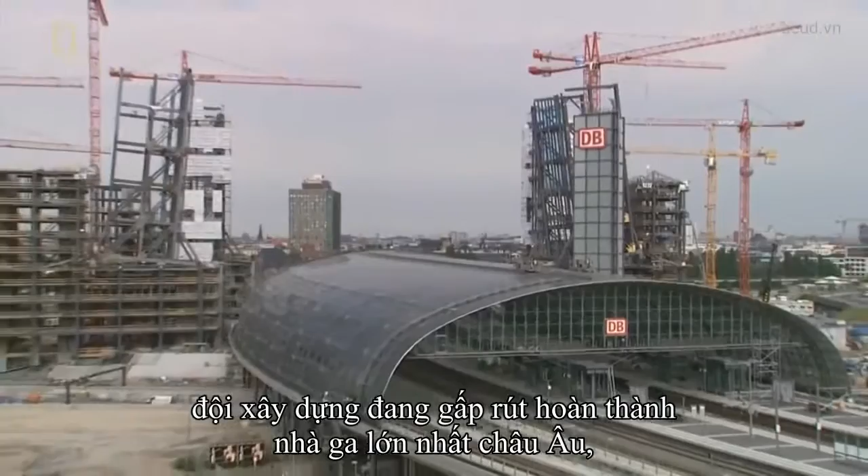Berlin, Germany. A construction team races to finish the largest train station in Europe before next summer's World Cup comes to town. To meet this deadline, 2 massive steel towers must be tipped over their new glass station in under 3 days. It's an engineering feat never before attempted. Can this team of engineers get this daring plan to work?

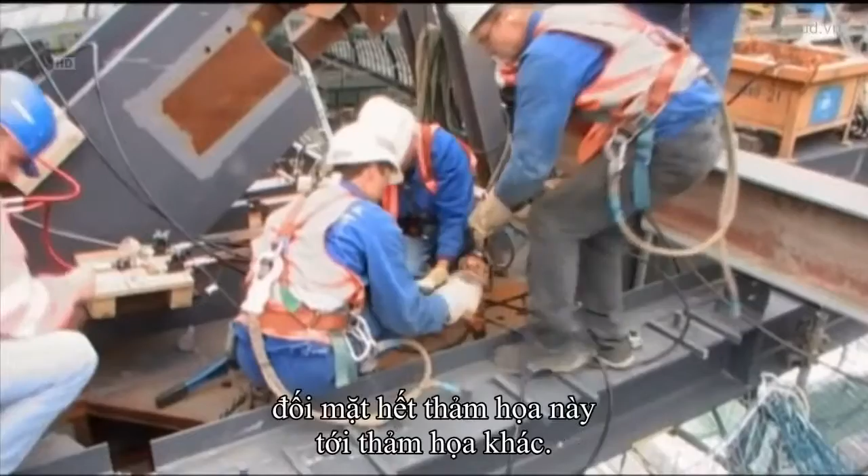In Germany, builders are racing to complete an architectural crown jewel. They've labored for over a decade, confronting one disaster after another. When finished, this will be the largest train station in Europe. 7 levels containing a staggering 180,000 square meters of space. Nearly as much space as the Empire State Building.

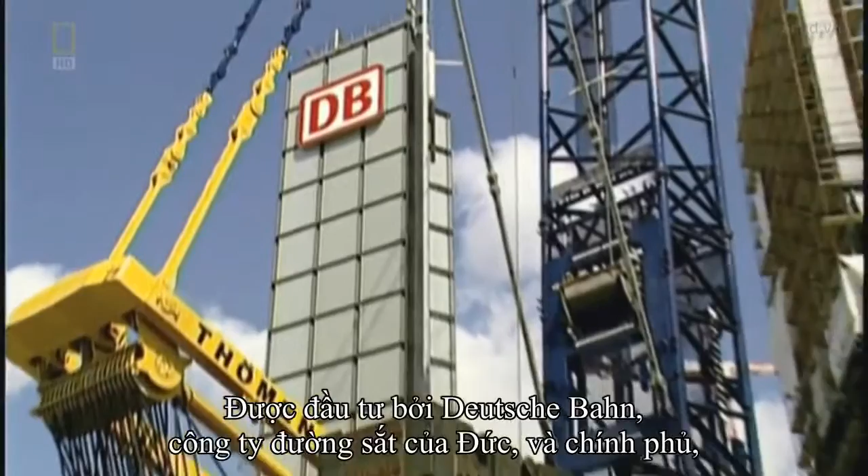Even more amazing, 2 office buildings will straddle the station, both standing 14 stories tall, with 4-story high bridges suspended just above the glass and steel roof of the station. The price tag? Over 4 billion euros and counting. Financed by the Deutsche Bahn, the German rail company and the government, and designed by a world-famous architect, the project is intended as a bold statement. If it works, it will literally and figuratively reconnect East and West Germany, ushering in a new era of unification.

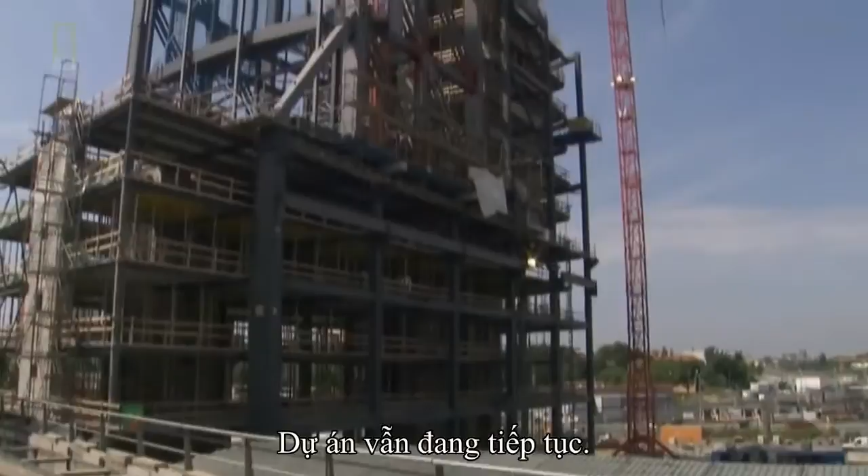But the project has faced terrible setbacks. It's years behind schedule and billions over budget. To make matters worse, the architect is suing the developers for cutting corners on his design. Soon, the project will be coming to a head. The builders are about to execute a move never before attempted in the history of construction. They will attempt to gently pivot these 2 massive halves into their final position, forming a steel bridge just 2 meters above the station roof.

It's a terribly risky scheme. If anything goes wrong and the bridge sections hit the glass roof below, the project would suffer unthinkable damage, and the cost would go up by more millions. Will Berlin's new central railway station ever be finished?

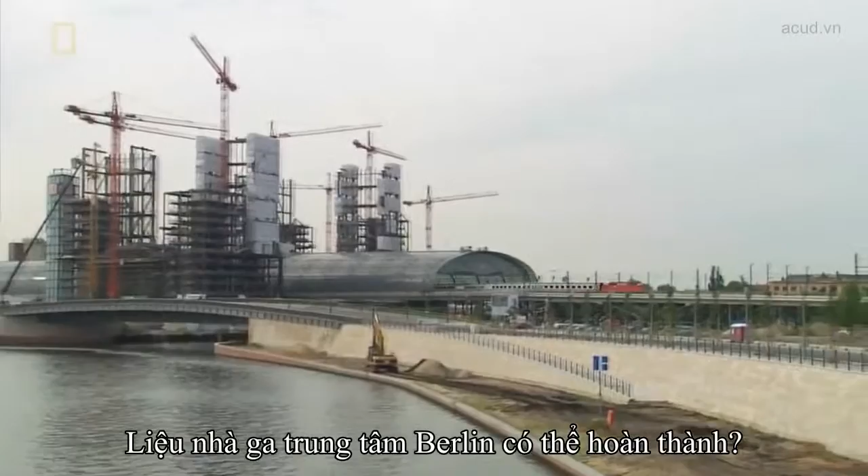Since the 1989 fall of the Berlin Wall, Germany's capital city has undergone a frenzy of rebuilding in an attempt to reclaim its historical place as the cultural and economic center of Europe. What better way to solidify that role, planners thought, than with a truly world-class rail station? As the centerpiece of a completely rebuilt transportation system, the station would not only relink East and West Germany, but all of Europe, by connecting Paris with Moscow and Stockholm with Vienna. Berlin, of course, would be at the center of it all.

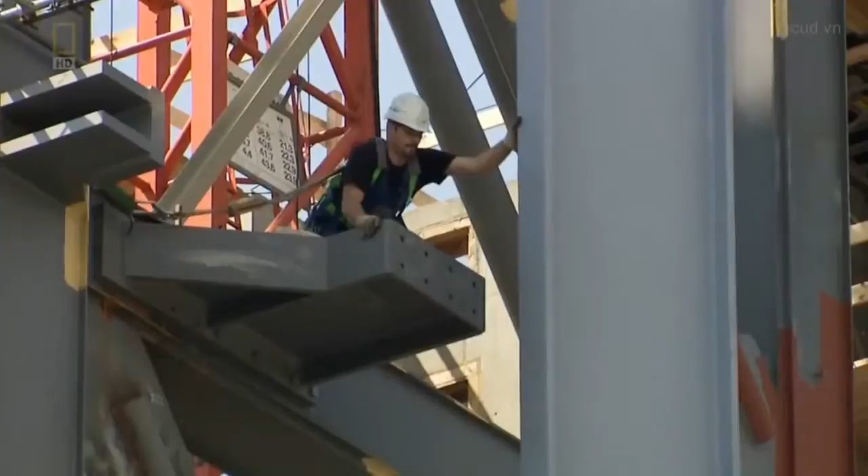But today, 5 years after its original scheduled completion date, the project is still under construction. And it's reached a critical moment. Down on the streets, crowds begin to form. They've come to watch an unfolding drama. A milestone event in the history of construction engineering. The fate of the entire project hinges on this step.

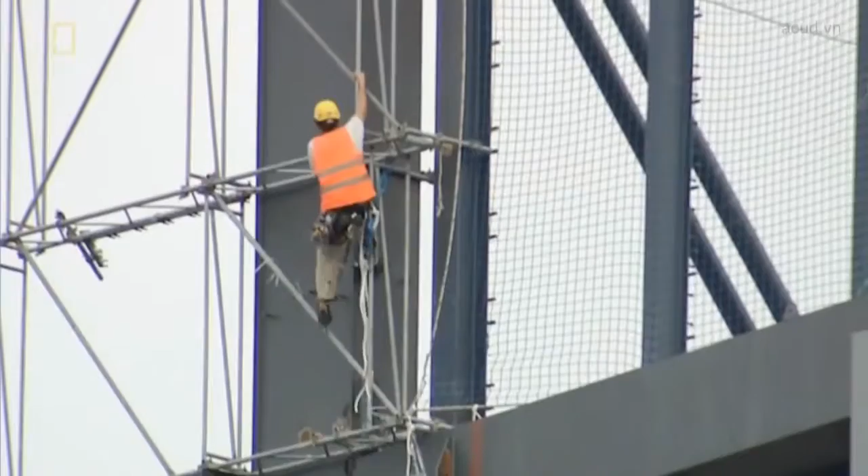Up in the air, a team of specialized engineers and workers are preparing to execute a dangerous maneuver. Scaling the steel like mountain climbers, workers make their final adjustments. Check and double-check hundreds of details. All eyes are now focused on a pair of huge steel bridge sections. When finished, they will form a bridge, 4 stories high, hovering just above the roof of the train station. The bridge will join the 2 sides of the office building and will itself contain thousands of meters of office space.

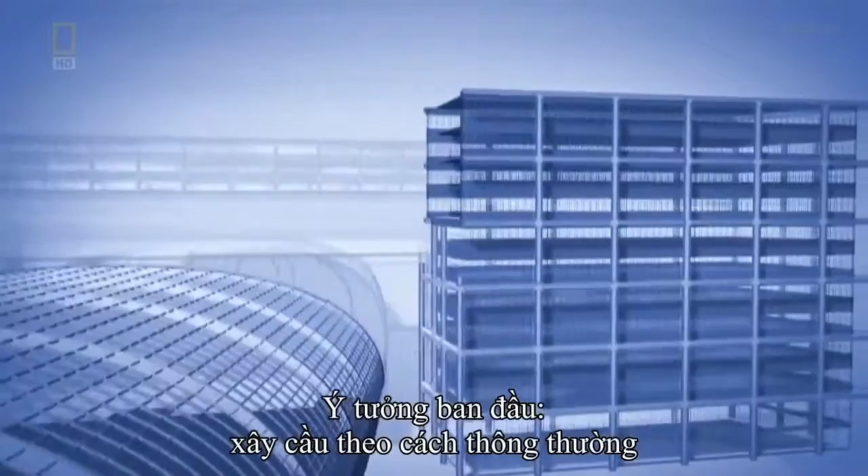Because building a working train station was the top priority for builders, the twin office towers would have to be built after trains were running through the nearly completed station. One of their original ideas called for building the bridge the usual way, starting at one side and building out horizontally over to the other. But engineers realized that building the bridges that way was too dangerous. Safety officials lay awake at night at the thought of cranes swinging these huge steel girders above their new glass roof train station, packed with thousands of commuters. They'd be forced to shut down train services over 6 weeks until the bridge was done. But that would have brought Berlin to a standstill.

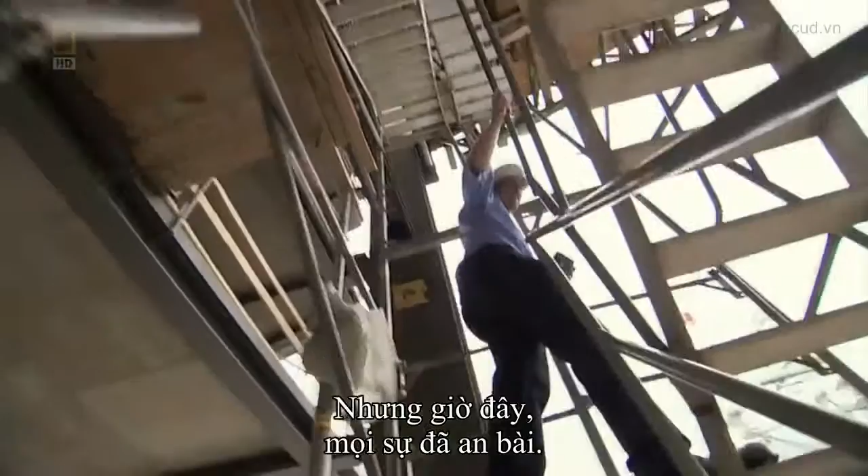So engineers came up with a remarkable solution. They would build the bridge in halves. Each half was built not out, but up. Now the 2 halves are ready to be lowered into place with cables. The tipping technique has never before been used in an urban setting. But now, there's no turning back. Starting at 10 tonight, train services through the station will be halted. But only for the weekend. They'll have 54 short hours to get the bridge lowered and the sections attached.

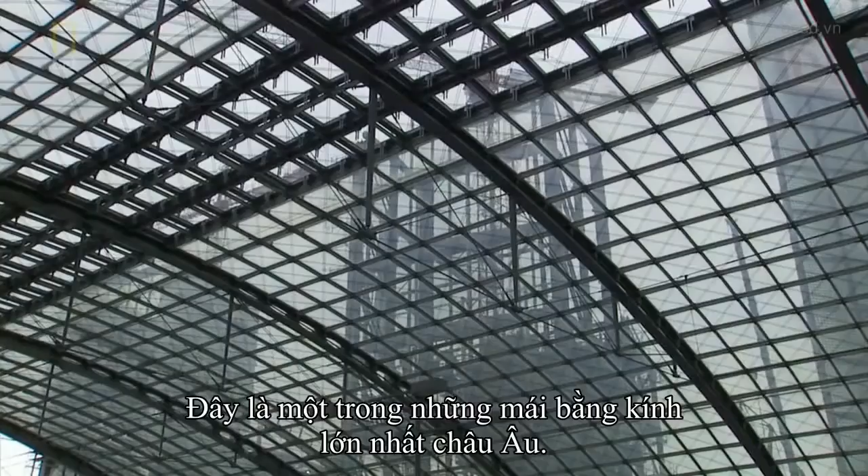But each section weighs over 1,200 tons. If something goes horribly wrong, it could mean the total destruction of the station's spectacular new glass roof. It has one of the largest glass roofs in Europe. Over 11,800 individual square panes. Each pane weighs almost 100 kilograms, bringing the total weight of the glass alone to 1.2 million kilograms. That's a lot of glass.

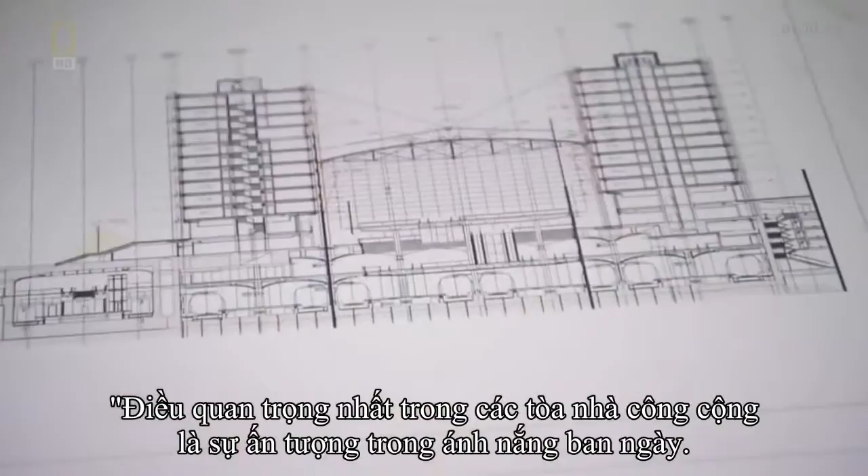World-famous architect Meinhard von Gerkan knew from the beginning that he wanted glass to play a prominent role in the station's design. The most important thing for a public building is to have the impression of daylight. You feel much better if you are part of the total environment, the natural environment.

As it happens, big glass structures are all the rage in Germany right now. When the Reichstag, the German parliament, was rebuilt in 1999, the government insisted on installing a glass dome on top to reflect the new German transparency. Glass has traditionally been a material of choice for train station designers, but it's always been expensive and tough to work with.

Early train stations with glass also needed immense support structures of steel to hold up all that heavy glass. The result, in spite of the glass, not much natural light could get in. The stations were still pretty dark. Von Gerkan wanted to do better.

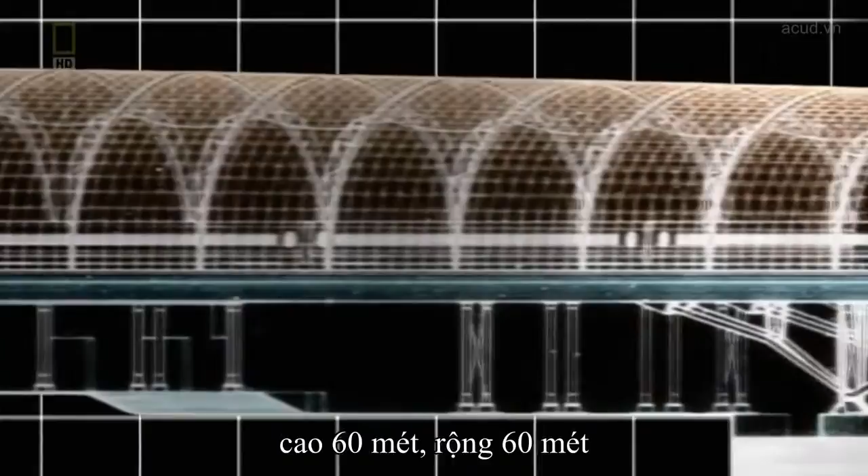His design called for a massive curving glass tube, 16 meters high, 60 meters wide, and over 400 meters long, to form a nearly transparent roof and walls for the main platform. He needed to find a way to eliminate all that steel, to have the glass support itself, or at least appear that way. But a glass structure can be as dangerous as it is beautiful.

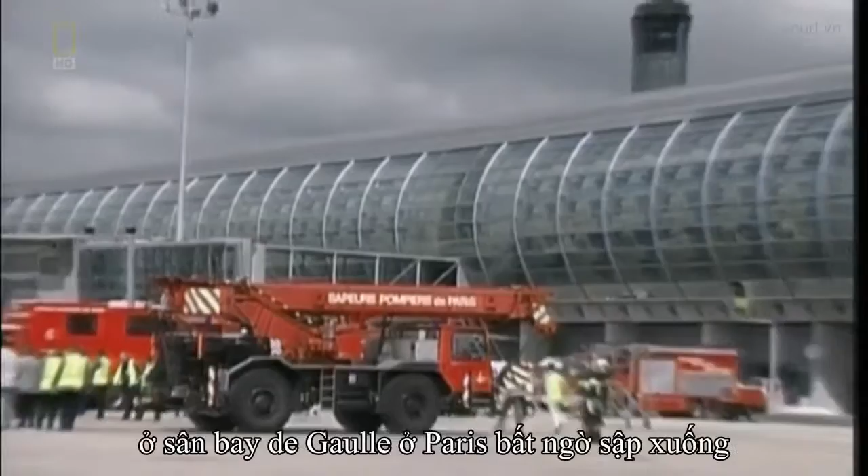In 2004, almost a year after its opening ceremony, a brand new glass terminal at Paris's de Gaulle airport suddenly collapsed, killing 4 people. Investigators pointed to both design flaws and construction defects.

Now, with just hours to go before the crew here in Berlin attempt one of the most unorthodox construction tricks in history, the possibility of disaster cannot be far from anyone's mind. It is the ultimate challenge for a project that has missed one deadline after another. Today, a new deadline looms, and the teams know they can't blow it.

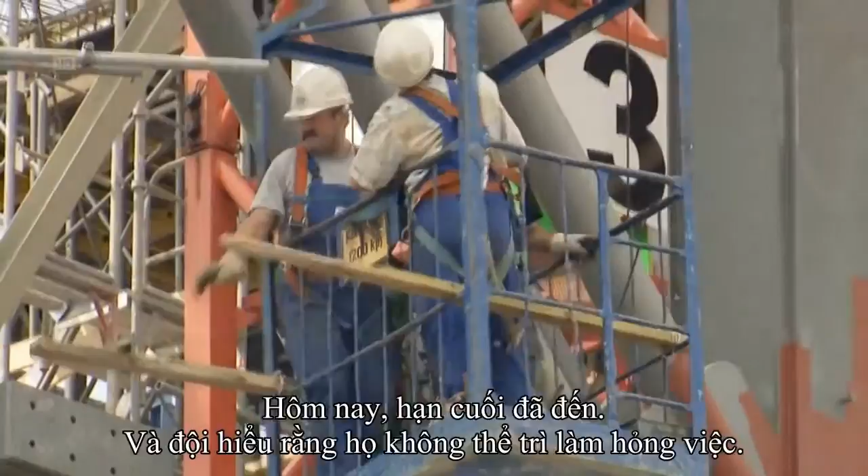Mid-next year, the World Cup football tournament will focus the world's attention on Germany, the most watched sporting event in the world with an audience of billions, more than even the Olympics. Millions of fans from across the globe will flood into Germany, with the final game here at Berlin's Olympic Stadium. City officials desperately want the global event to also serve as the station's inauguration.

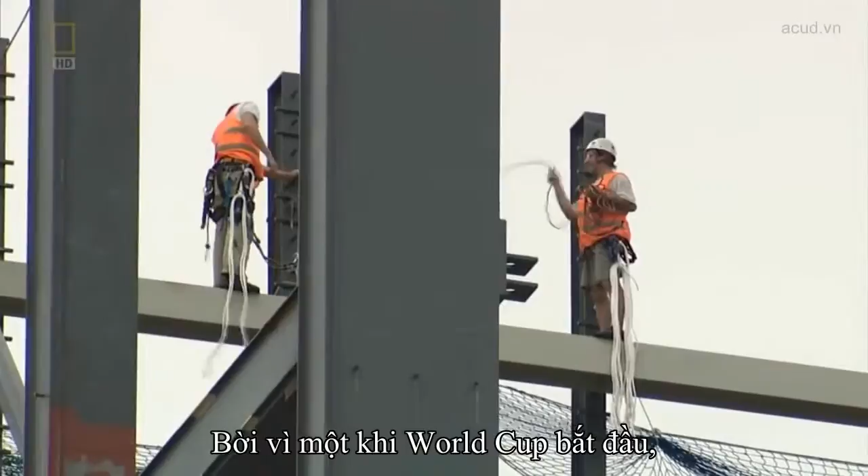Berlin officials expect up to 3 million football fans to descend on the city. They desperately need the station completed, because once the games begin, nearly 500,000 fans will use it every day. If the project is still under construction, it will be a huge embarrassment for the country in front of an international audience.

All this pressure now sits squarely on the shoulders of the two men in charge of the operation. Olaf Severin will run the crew lowering the south tower. Bernd Naujoks will lead the north tower team. They go over the plans one last time. Years of preparation have led up to this weekend.

At 10 tonight, all train traffic through the station will be halted. Olaf and Bernd must complete the work by 4 a.m. Monday, the start of rush hour, when the train schedule must resume. If they're late, Berlin becomes one huge traffic jam. Between now and Monday, neither one of them plans to get much sleep.

On paper, the plan is simple. Each bridge section currently stands on its end. Both towers are fitted with 12 massive jacks, 4 on top and 8 on the bottom. To begin tipping the sections, the men will first activate the top jacks. These jacks pull up on a series of steel cables anchored to the tower, tipping the tower on a single pivoting hinge.

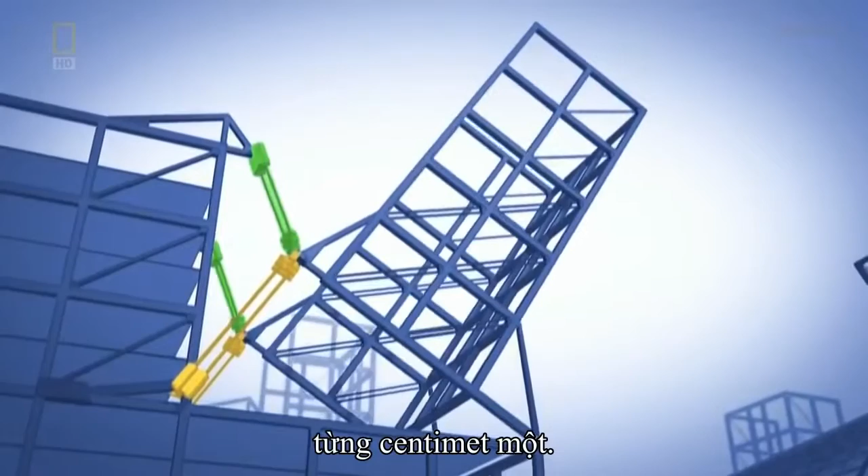Once it reaches an angle of 15 degrees, it will start to fall. To keep it from crashing down, the bottom jacks are now activated. These jacks act as a brake, lowering the tower by slowly letting out a second set of cables, centimeter by centimeter. The two sets of jacks share the load until the bridge sections reach an angle of about 40 degrees. At that point, the bottom jacks take over completely for the rest of the ride.

A simple plan, but with years of experience, Olaf knows problems could spring from any direction. Snapped cables, misfiring hydraulics, high winds. So computers are on board to control the process. They can monitor the shifting weight, regulate the speed of the jacks, and shut down everything if they sense a problem.

Olaf and Bernd share final authority, and each of them knows that if they have to, they can override the computers. The two decide to make a bet on who will get to the bottom first.

One thing is for sure, Bernd. We will reach the bottom first. What? No, no. Let's bet a case of beer.

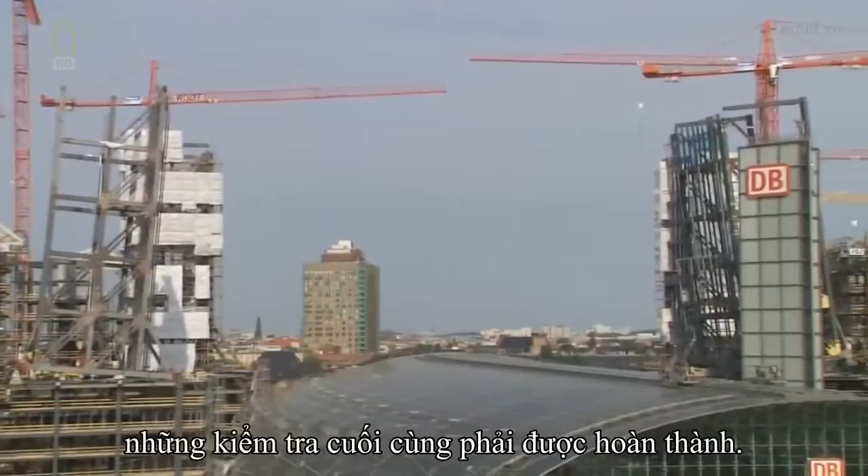But before the starting horn can sound, final safety measures must be finished. Workers dangling 70 meters in the air attach nets to the bottoms of the bridge sections.

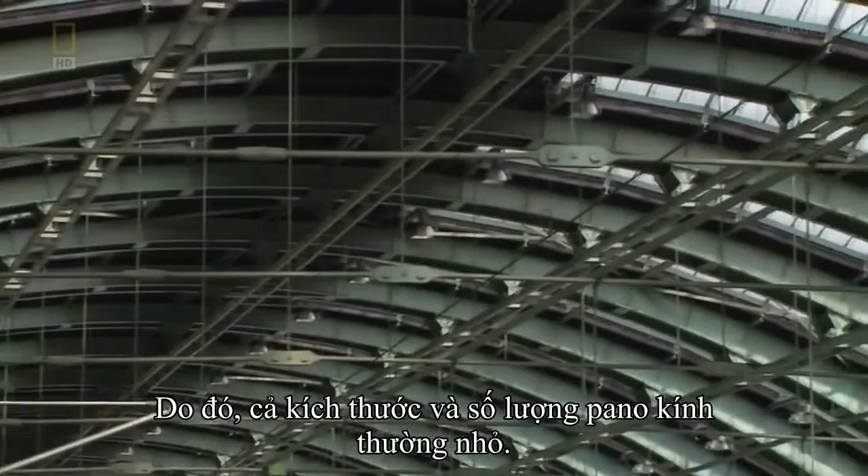The nets are supposed to protect the nearly 12,000 glass panels of the station roof, in the event that something falls from one of the sections during the tilt. Glass has been used in train station roof construction for over a century, but early builders were limited by the expense and fragility of glass. So builders kept both the size and the quantity of the panes they used small.

Architect von Gerkan's design for the new Berlin station called for nearly 12,000 panels, each over a meter square. For such a vast quantity, project managers came here to the Guardian Flachglas factory just outside Berlin. Virtually all of the glass used in the station was manufactured here, using a modern method called the float process.

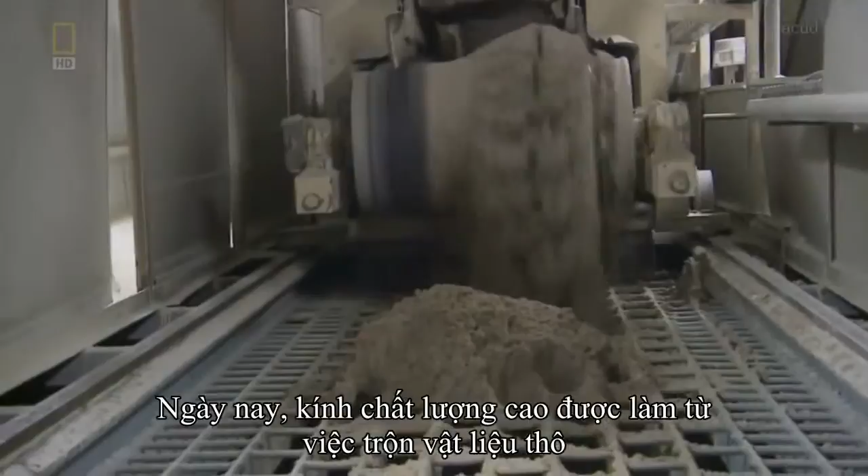Today's high-quality glass is made from a blend of raw materials, including silica, soda, and lime. These ingredients are combined with recycled glass and fed into a huge furnace. The furnace is heated to over 1,500 degrees Celsius, hotter than volcanic lava. So hot, workers can only keep watch through tiny windows, wearing heat-resistant clothes and goggles.

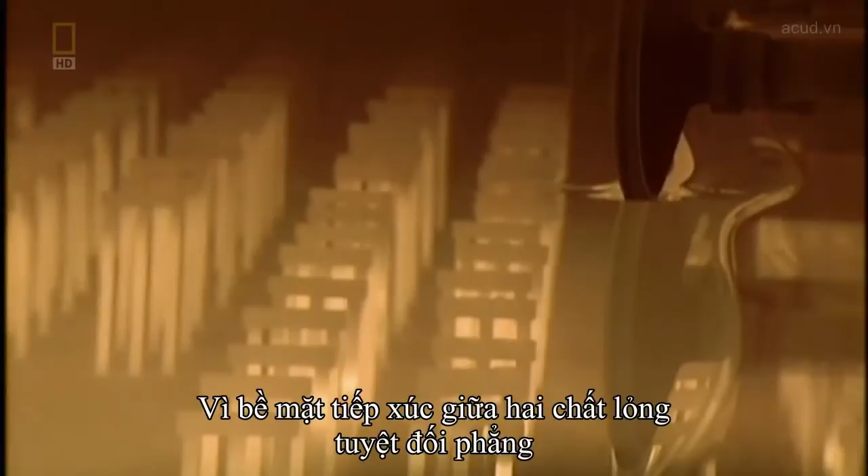The extreme heat inside the furnace melts the ingredients into a liquid glass. The glass spreads out over a layer of molten tin. Because the plane of contact between the two liquids is perfectly flat, the resulting glass will be virtually free of optical distortion. Next, the glass is slowly cooled in these 120-meter-long giant coolers.

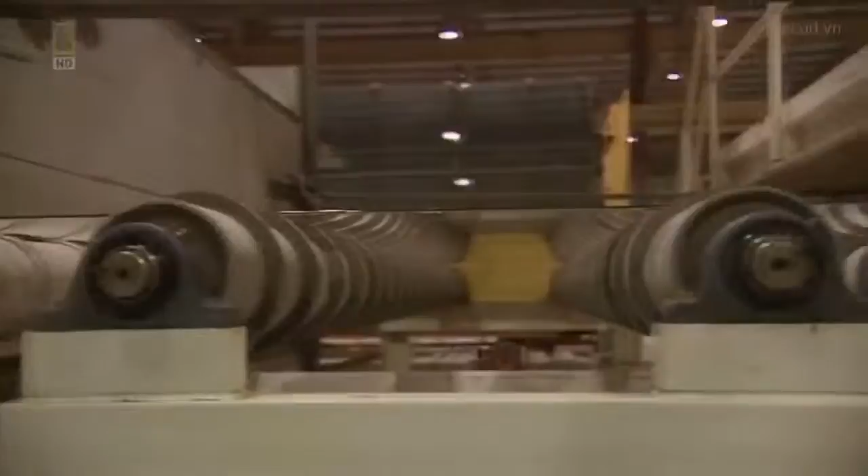This factory could theoretically produce glass sheets over a kilometer long, but they would be essentially impossible to ship. So each piece is then scored, cut to size, and trimmed.

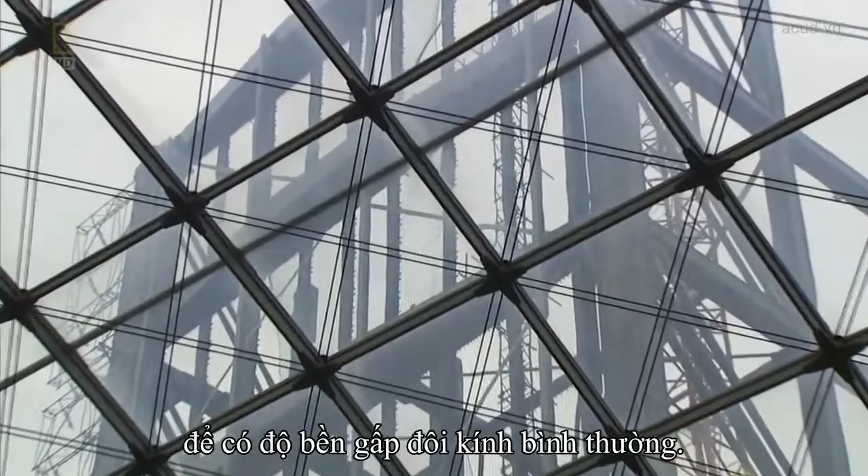But the glass panels von Gerkan needed for the train station needed to not only be large, but also extra strong, capable of withstanding bad weather and the constant vibrations from trains. So the glass for the station is tempered to make it twice as strong as normal window glass. As a final step, a layer of UV-absorbing material is fused with the glass. This step helps prevent the station from becoming the world's largest hothouse.

Back at the construction site, there are only 3 hours left until the big tip-over is supposed to begin. Team leaders Olaf and Bernd are anxiously awaiting the signal that train traffic through the station has been halted so that they can begin the delicate operation. But now there's a new worry. The skies over Berlin are looking ominous, and severe thunderstorms are forecast.

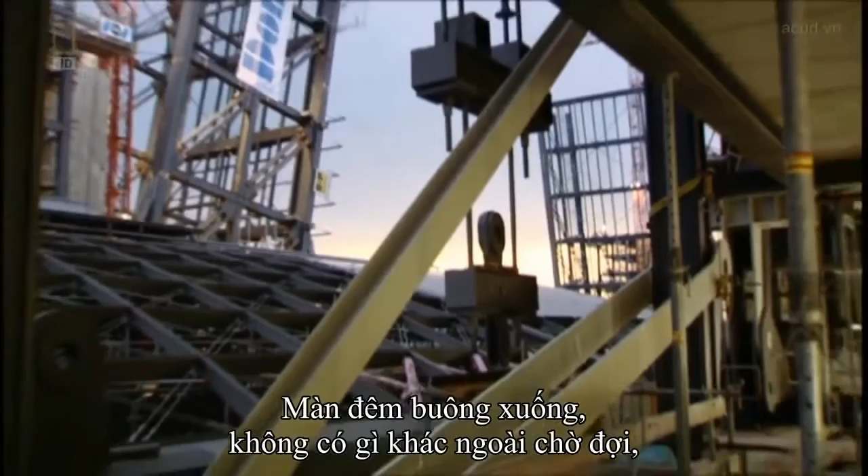The two men know they must do everything they can to stay on schedule. The trains can only be stopped for 54 hours. But they can't put their men at unnecessary risk. If the conditions get too bad, they'll be forced to call off the procedure. As night falls, there's nothing to do but wait and hope that the storm blows over.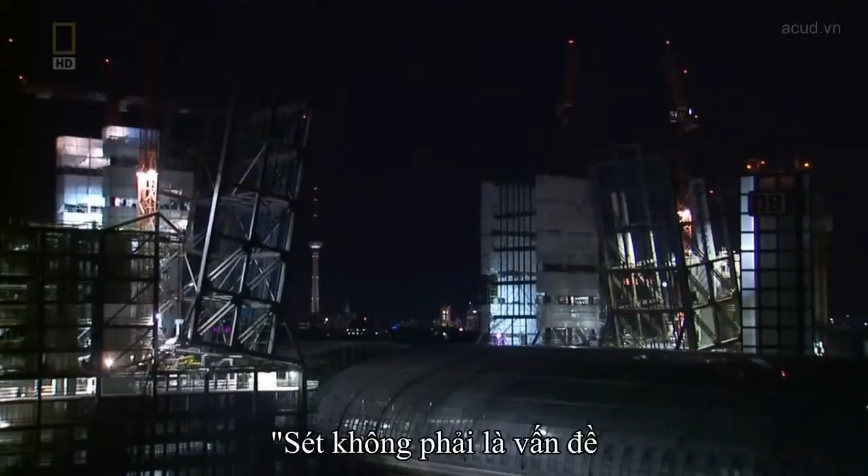10 p.m. at the construction site of the massive Berlin rail station, and lightning is lighting up the sky all around. Rain is coming down in sheets, but the wind seems to be holding, so engineers make the difficult decision to proceed. Lightning should not be a problem. The wind has started to increase, but our static calculations consider such wind loads.

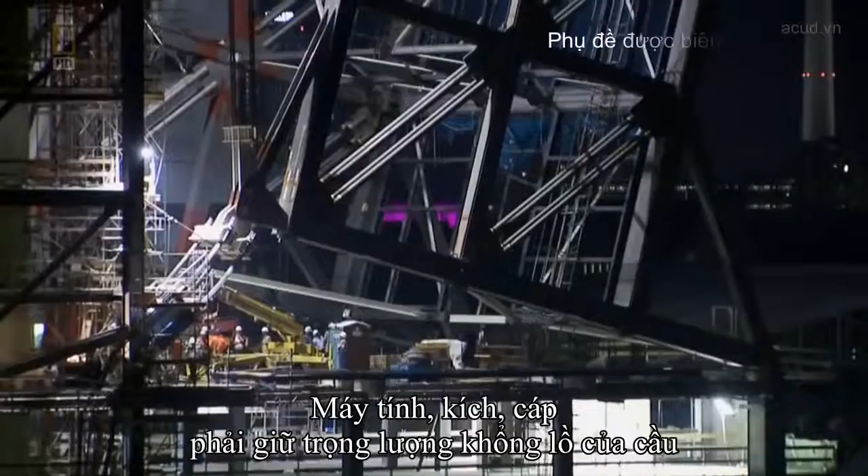After the last train leaves the station, the starting horn blares. Foreman Bernd gives the signal, and his North Tower team springs to action. The name of the game in this entire process is control. The computers, jacks and cables must keep the massive weight of the bridge sections under constant and complete control for the entire tilt. If they don't, the sections could jerk or start to sway, which could be disastrous.

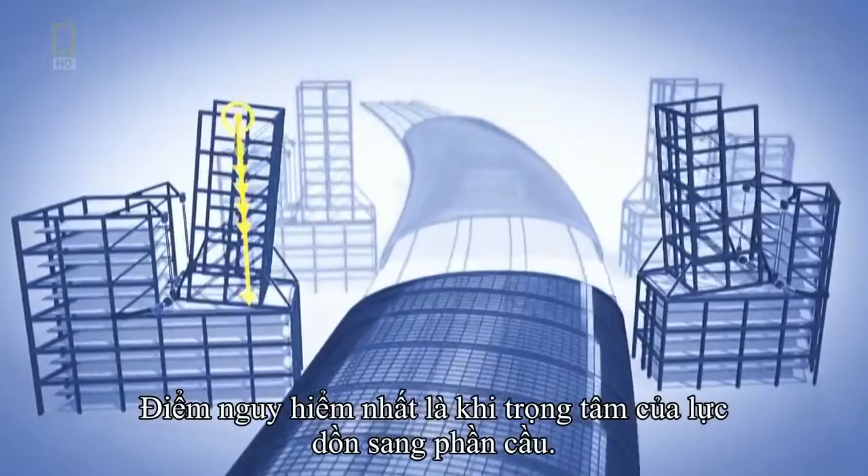Of course, gravity will be doing most of the work. All the machinery and all the men are here simply to keep gravity from working too fast. The scariest point will be the moment when the center of gravity shifts on the bridge sections. At that moment, the 12 jacks and nearly 400 cables will be pushed to their limit as they carefully lower the 1,250-ton weight of each section over the station. If the team can get past that changeover point smoothly, the rest of the ride down should be easy.

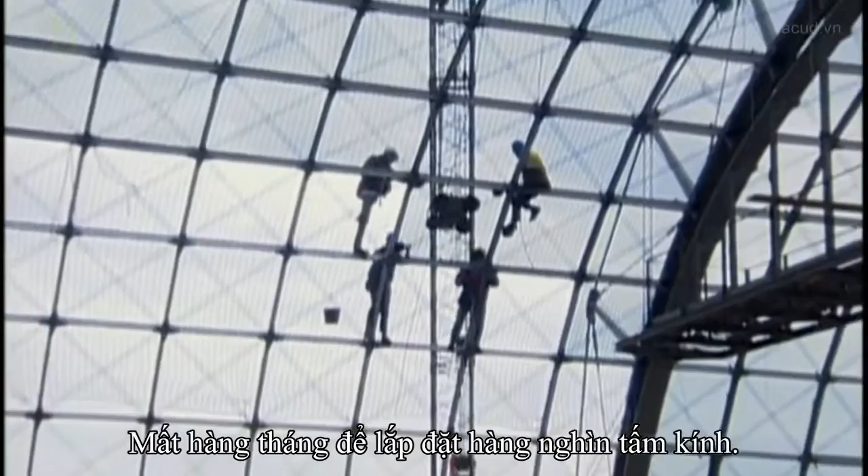The operation is the first time in construction history that two massive towers have been intentionally tipped over so much glass. It's taken months to place the thousands of glass panels. Each panel sits inside a perfectly sized steel square frame. This interlocking steel framing matrix is a crucial element of the design because the steel itself is so thin, it almost looks like the glass is supporting itself.

Architect von Gerkan wanted the station flooded with light, so he needed to find a way to hold up the glass with as unobtrusive a support structure as possible. And he could not sacrifice safety. The structure needed to hold firm against constant vibration from the trains rumbling through below, hundreds every day. Von Gerkan also wanted to avoid cluttering up the interior of the station with traditional support posts. So project engineers came up with an ingenious solution: an elaborate skeleton of external supports.

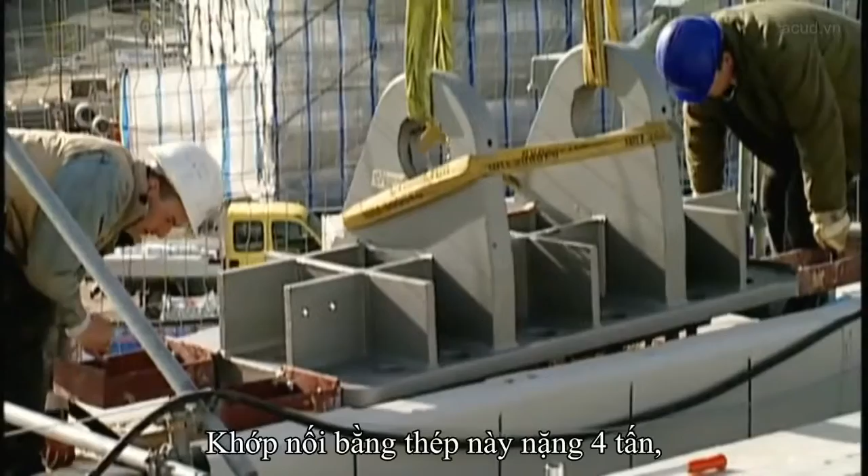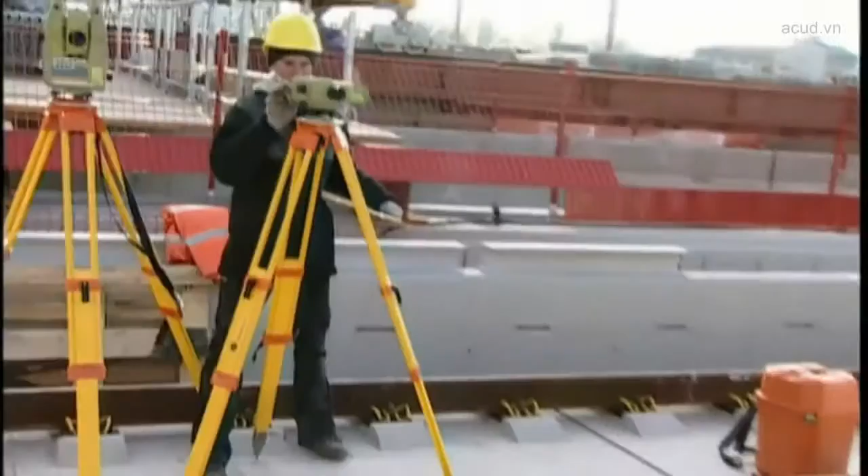This steel anchor joint weighs 4 tons, nearly as much as 2 SUVs. It's one of 46 identical anchors that, when placed and bolted, will serve as the primary support for the entire glass and steel lattice above. Each joint will be capable of holding almost 200 tons. Placement is critical. A surveyor carefully guides the team. Once the anchor joint is secure, cranes lower one end of an 11-ton end section of one of the station's arching main support beams.

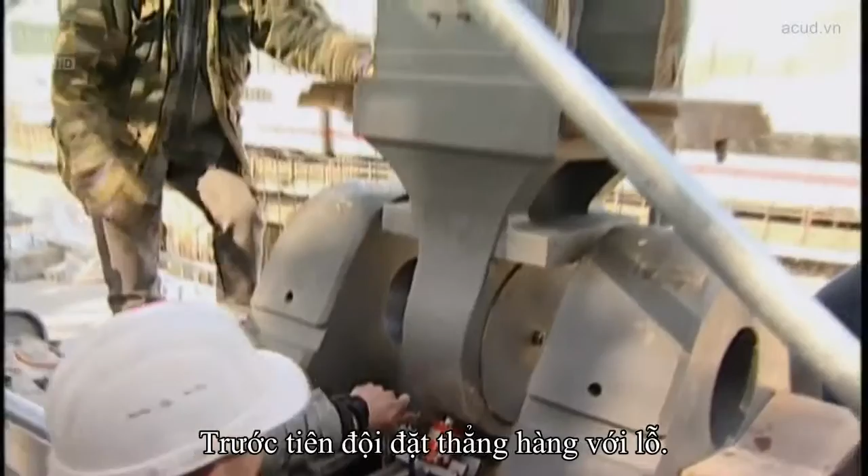It's not unlike the world's biggest door hinge. First, the crew carefully aligns the holes. Then a 300-kilogram steel locking pin is slid through the holes. This hinged joint will let the huge beam sections rotate as needed during construction. They will also let the entire structure expand and contract without creating wear and tear on the joints.

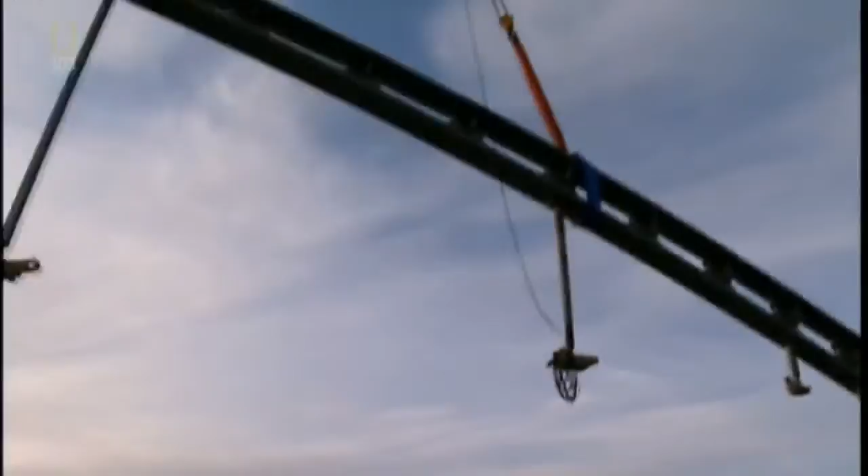Once this end of the beam is locked into its anchor, the other end can be placed into an identical facing anchor on the other side of the station. Each complete beam is made up of 4 interlocking sections. The steel and glass latticework hang between these mammoth support beams.

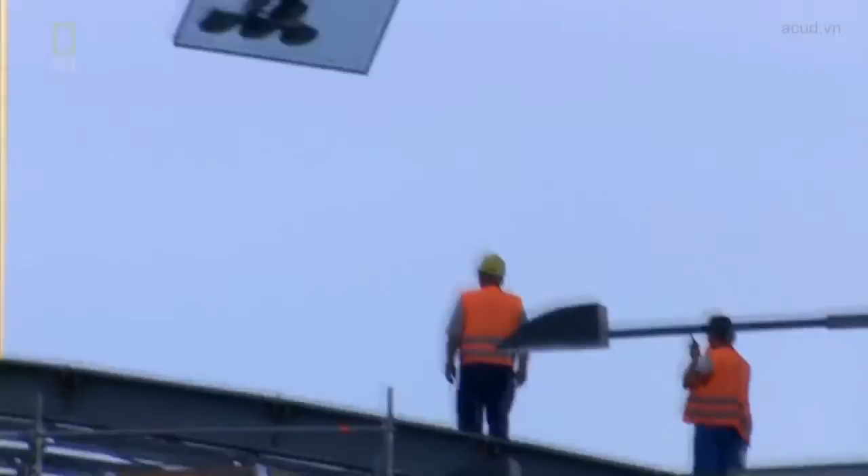After the last beams of the steel support arches are placed and welded, it's time to install the glass. Cranes specially fitted with suction cups gently lift one pane at a time to the crew. This part of the job requires calm hands, a steady nerve, and a delicate touch.

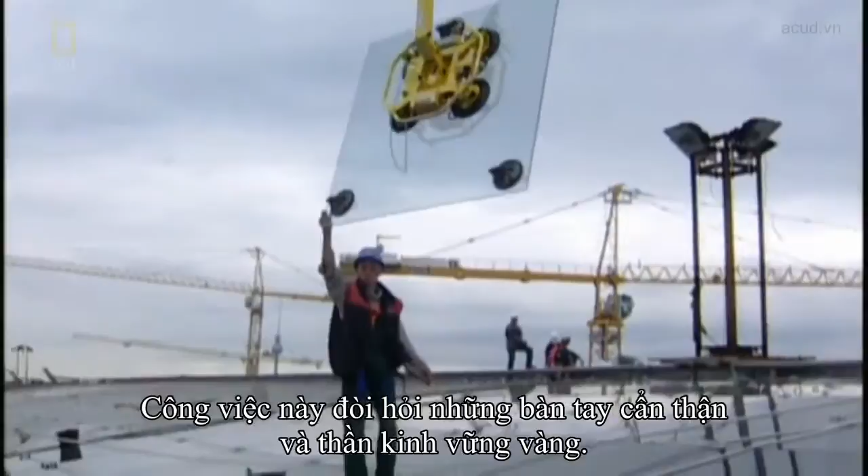Working 16 meters above the tracks, workers must stretch to receive the glass, then stretch again while they dangle over the open steel frames. A spritz of glue, and the pane pops in. It took the crew working day and night for 4 months to install the glass to this point.

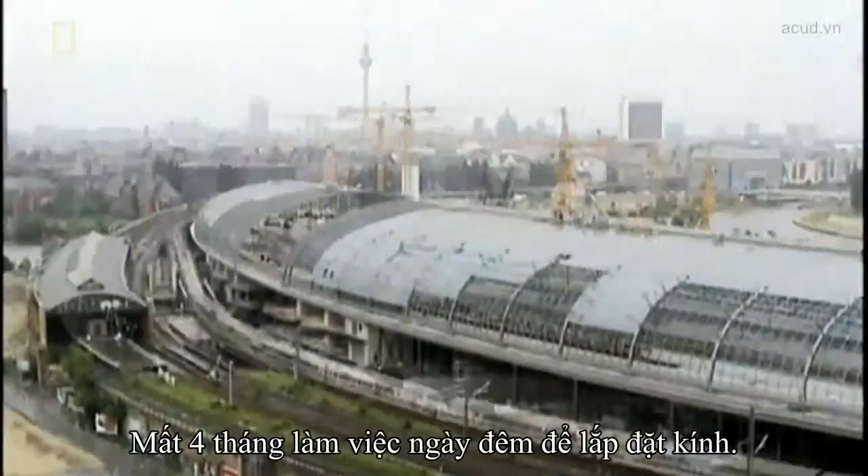Today, only a 9 square meter section remains to be glassed. And while it's been all sorts of fun, nobody here relishes the thought of having to repeat this process. And that's just what they'd have to do if this station roof winds up getting smashed to bits by an out-of-control bridge section.

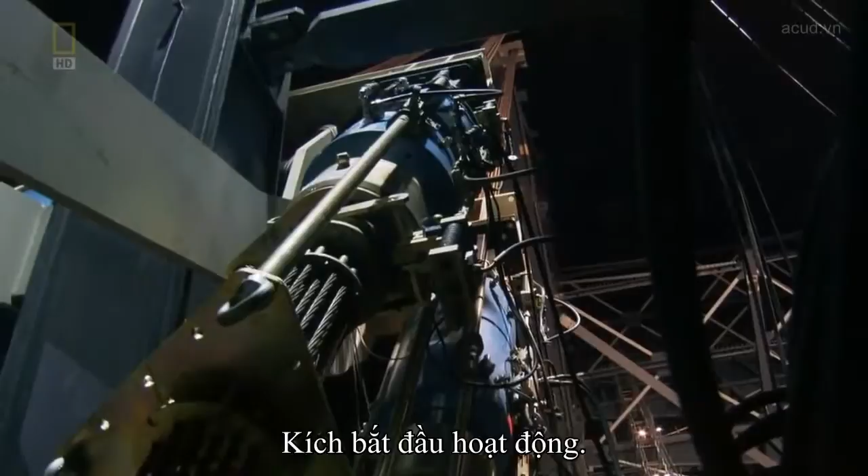Back at the tip-over, workers wait for the signal to start. Bernd calls from the control room. They flip the switch. The huge jacks spring to life, and the massive towers begin their slow descent, 6 meters an hour.

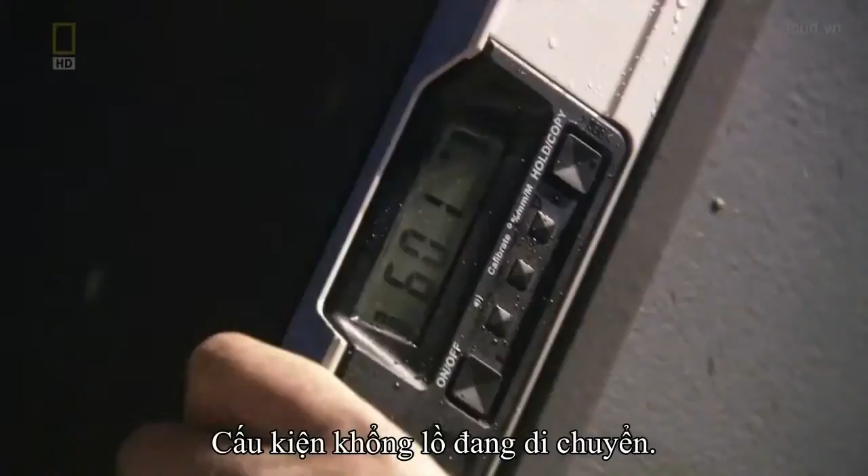As rain pelts the station, and all train traffic through the station remains stopped, workers check and recheck the tower's progress. Since the movement is almost imperceptibly slow, a simple ruler and bubble level provide assurance that the huge sections are indeed moving at all. Bernd's North Tower takes a slight lead.

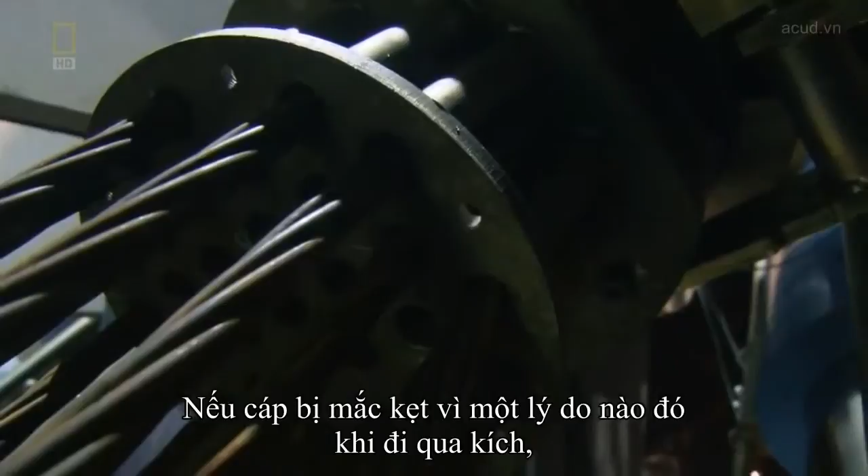One of their main concerns, the cables. If a cable binds or gets stuck for any reason while going through the jacks, it could cause the steel to jerk and sway. So workers armed with lubricant will keep that cable well oiled all night. Their crazy plan seems to be working.

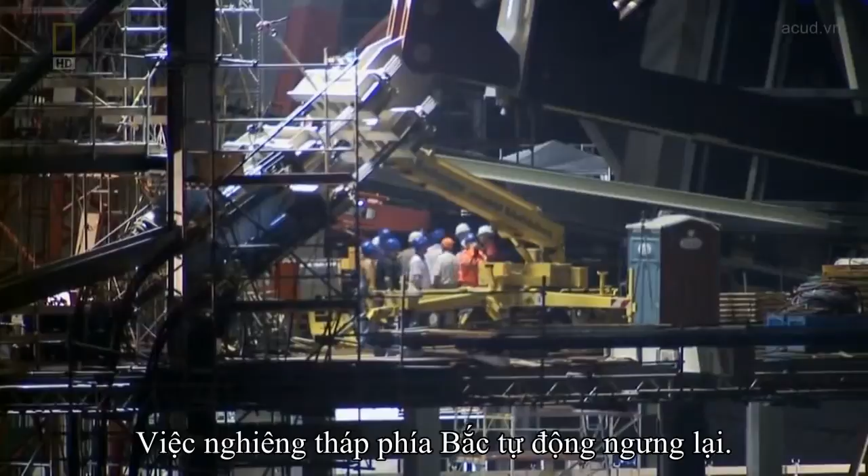Then suddenly, less than 2 hours into tilting, a problem erupts for Bernd's North team. The electronic signal coming from one of the jacks suddenly stops working. Without a signal, the emergency system kicks in. Tipping on the North Tower is automatically halted. Now it's a race against the clock and the weather.

3 hours ago, tip-over came to a sudden halt when communication between one of the jacks and the control room was lost. When working, the signal allows the computers to control the tower's every movement. Technicians believe the heavy rain shorted the line. It could take hours to fix.

Back in the office, team leader Bernd Naujoks makes a bold decision. With so much on the line and the clock ticking, he decides they can't wait for repairs. He tells his team to fire up the jacks once again.

Without the precise monitoring of the computers, engineers must monitor every centimeter of the tip-over, manually, with surveying tools and levels. One more job for an already overtaxed crew. Even the slightest miscalculation could spell disaster, but it's a risk Bernd feels he must take. Just another crisis for a construction project that has been plagued with problems.

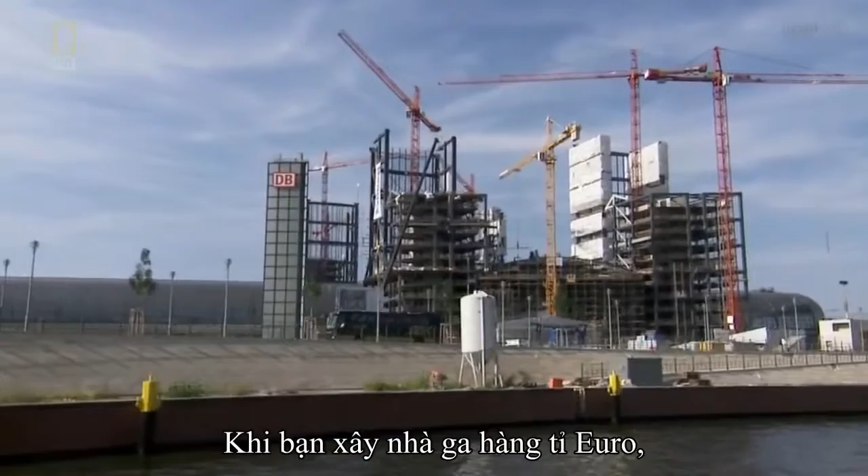When you build a billion-euro mega train station, it's all about location, location, location. The chosen location for the new station had once been the site of a majestic train station called the Lehrter Bahnhof. But that station suffered irreparable bomb damage during World War II and was then demolished in 1959.

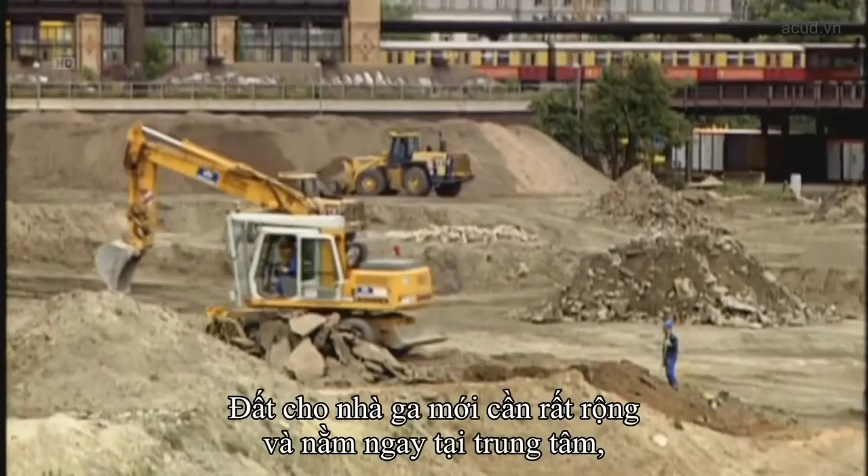In the early 1990s, when planners first came here, only a small local train terminal stood on the grounds. The land for the new station was vast and centrally located, right in the middle of Berlin, the perfect spot. But big problems popped out at engineers immediately.

The ground beneath the site, along the bank of the Spree River, was mainly composed of fine sand. While the site was adequate for this small terminal, the new station would be several times larger. Nothing that large could ever be built on top of this sandy site, and that wasn't the only problem. The ground was also extremely saturated with water, making the construction area even less stable.

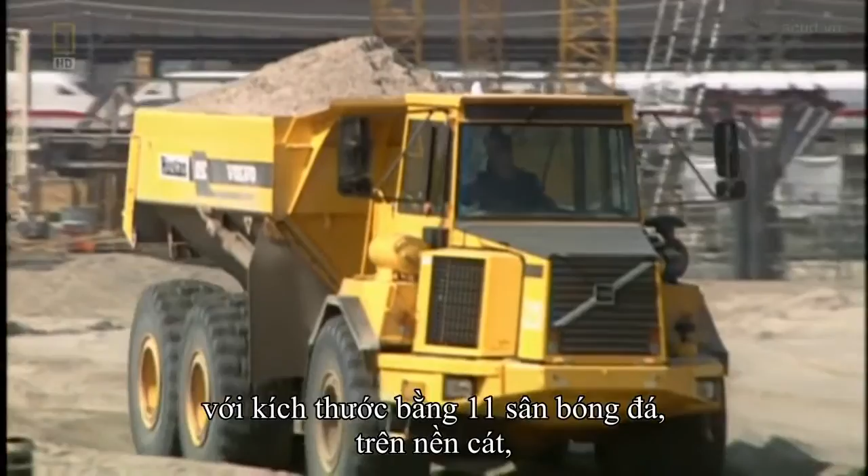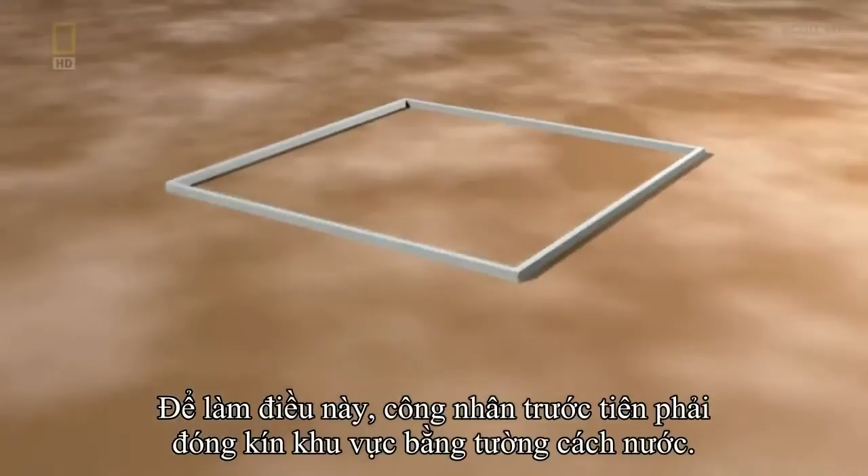Engineers needed to not only build a solid foundation, the size of 11 football fields, across this sandy area, but also construct the 2 lower floors of the station below the groundwater level. In 1996, construction began on the 90,000 square meter foundation and the lower station floors. To do this, workers first boxed in the massive area with waterproof walls. The 1.5 meter thick concrete walls extended down 25 meters below the surface.

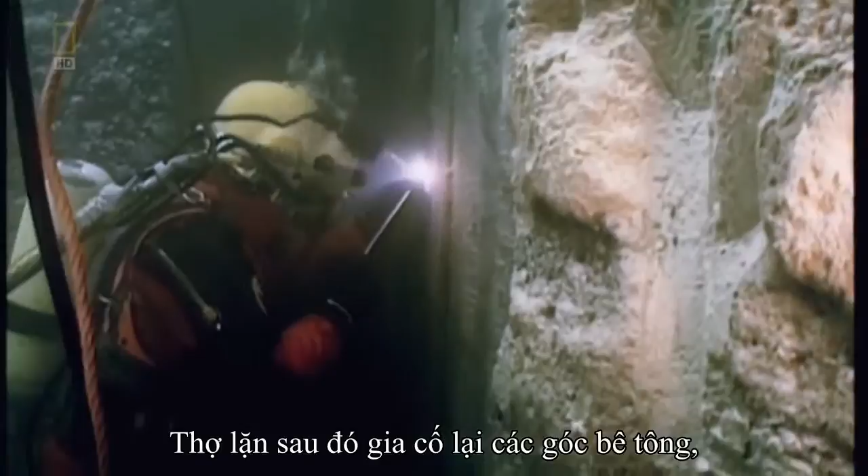Excavators then shoveled out the earth between the walls. As they removed the dirt, the groundwater filled in. Once they excavated to a depth of 20 meters, they poured a 1.5 meter thick concrete floor under the water. Divers then reinforced the concrete corners, making a watertight box.

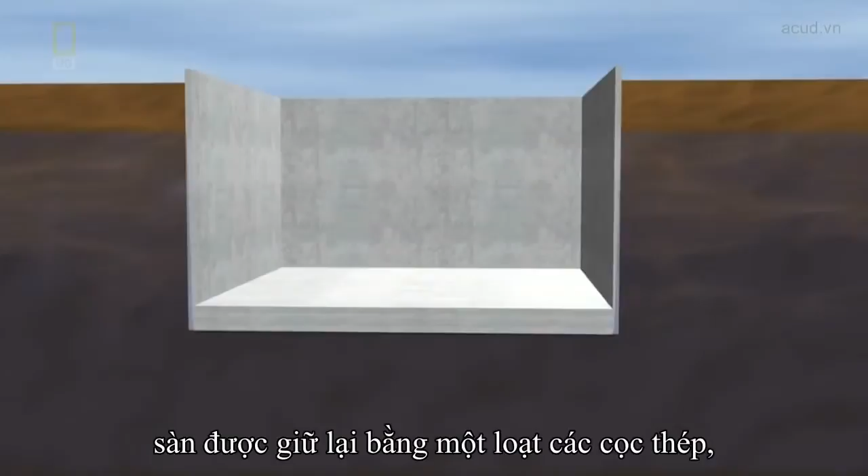The water left in the box was pumped out, but without the water in the box to equalize the pressure, the water below these concrete floors would exert a tremendous force on the new foundation, 20 tons per square meter. This pressure would cause the floors to pop like a champagne cork. To prevent this, the floor was held down by a series of long steel piles, almost 30 meters long. With these huge spikes holding the foundation firmly in place, the rest of the station could be built.

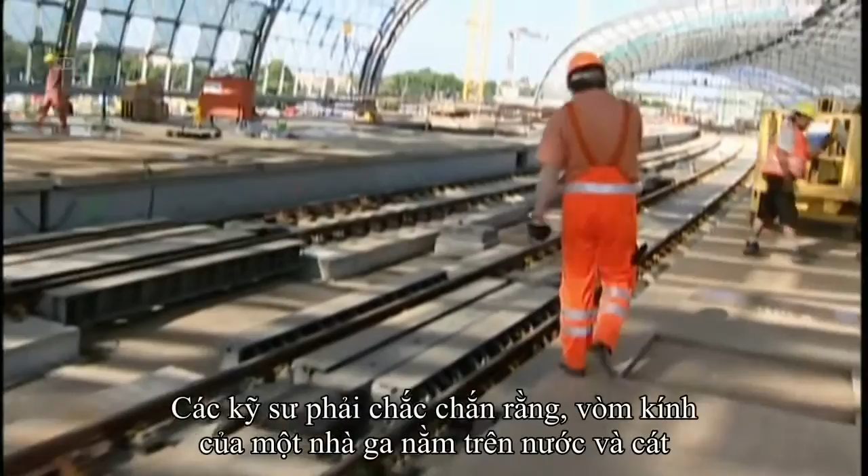Bridges and support beams could be erected, and tracks laid into position. But a big question still remained. Would it hold up the trains? Engineers had to be certain their glass-domed station sitting on a bed of water and sand could hold up under constant pounding. A train weighs about 800 tons, or as much as 300 pickup trucks, running over the bridges and supports over 50 times an hour.

So the station was put through a rigorous battery of tests. Motion sensors were attached in key areas throughout the station, on the bridges, the supports, and along the tracks. Then they called in the big rigs. Trains weighed down with over 40 tons of concrete slabs, running over the tracks, over and over, and over again. Measurements were taken all along the track and fed into a master computer.

The station was designed to be flexible, but if it shifted by more than 5 millimeters, they would need to shut down until it could be reinforced. When the final readings were measured, the station held up. It was ready for trains. In July 2002, the media came out in force to watch the first train to ever run through here. But no one was calling this station done.

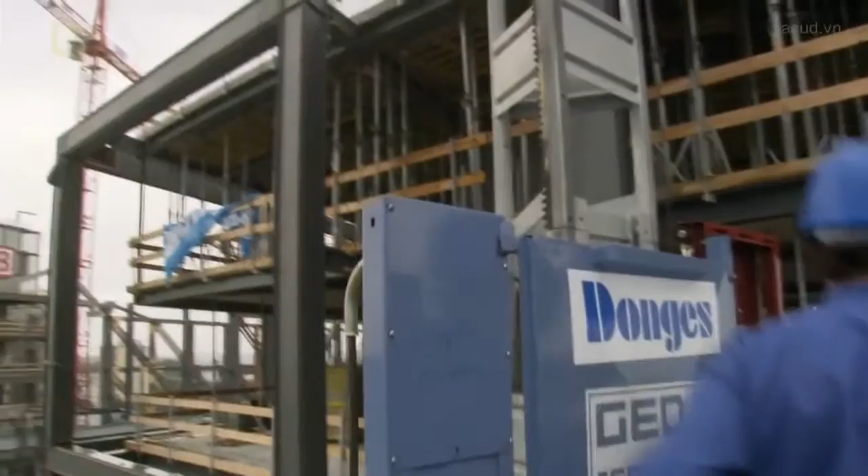Today, the pressure to get it done sits on foreman Bernd Naujoks. Since he made the daring decision to restart the tipping of the North Tower, without the computer signal from the jacks, his tower is once again slowly lurching forward, tipping 6 meters an hour. Bernd's big gamble seems to be paying off. He only hopes it stays that way.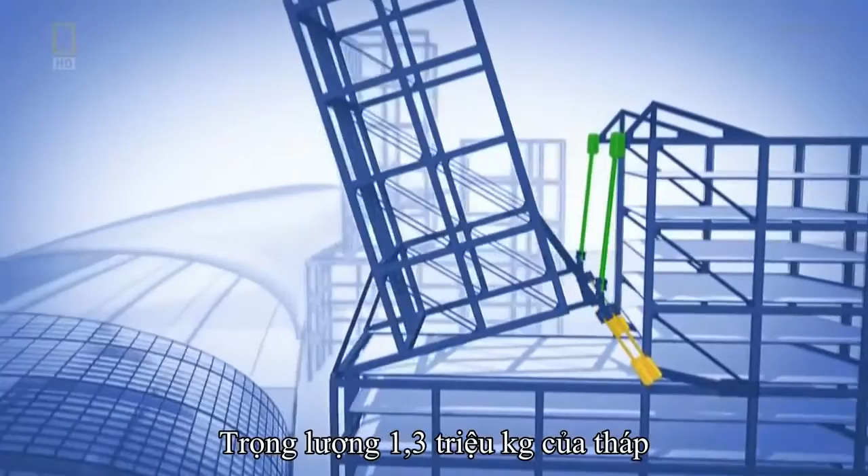It's been a long, sleepless night for workers attempting to tip 2 megatowers at Berlin's Central Station. And no one is sleeping now. Foreman Olaf Severin's South Tower is about to reach the scariest stage of tip-over, when it reaches a 30-degree angle. At that moment, the center of gravity starts to shift on the bridge sections, slowly switching the burden of the tower's weight, all 1.3 million kilograms, over from the upper jacks to the lower jacks and cables.

The jacks must maintain equal tension on either side of the tower. The delicate balancing act continues until about 40 degrees, when the upper jacks will no longer be assisting the tip over. If it isn't executed perfectly, this tower could start to swing out of control. As the South Tower reaches the critical angle, a team of surveyors starts computing some of the most important data of their lives.

Bleary-eyed from lack of sleep, they work quickly, checking their predicted calculations against what they're actually seeing. After checking everything, the tower's angles are all within the acceptable range. They believe the lower jacks and cables are ready to hold the entire tower. Olaf stops the tipping.

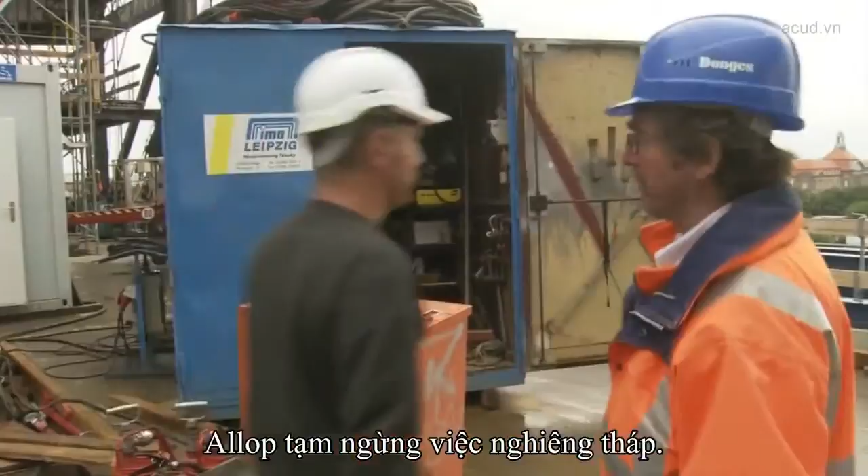Over 1,200 tons of steel and concrete dangle above, held in place by nearly 400 steel cables. The 4 upper jacks are no longer needed, so 3 workers crawl up to take them apart and remove their cables.

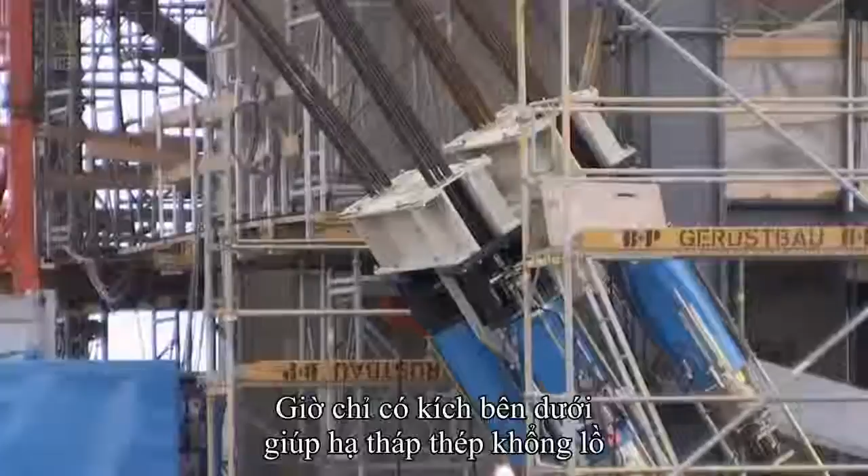Now just the bottom jacks remain to lower the massive tower, weighing more than 6 jumbo jets. The starting command is given. Pumps hiss, jacks groan. 250 steel cables strain from holding up all that weight. The surveyors and engineers keep vigilant watch. But the cables hold. It should be all downhill from here.

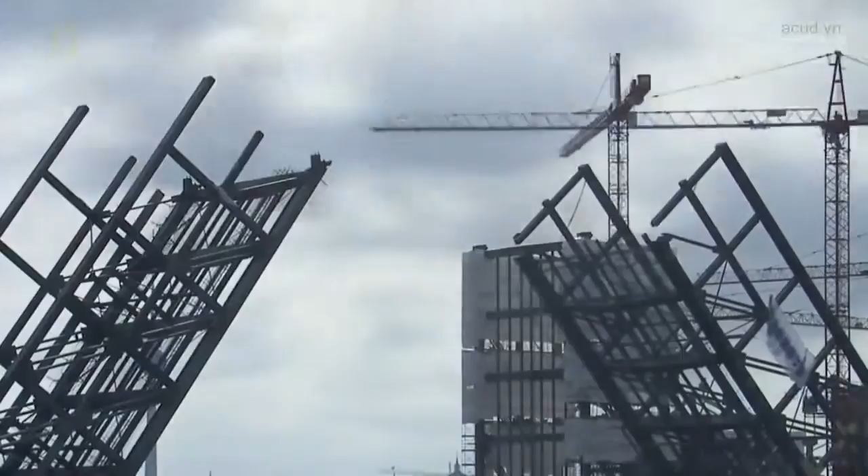Down on the street, a crowd has formed to watch the show. This guy thinks they're doing it all wrong. On this side, the ropes are slightly loose. I don't know if everything's been thought through.

12 stories above, the North Tower just passed through the critical switchover stage unscathed. Since making the daring decision to tip without computer monitoring, Bernd's team has managed to make up some lost time. If they keep at this pace, they'll finish ahead of their deadline, but still behind the South Tower. I have to get going and buy the beer. I'm afraid I'm having difficulties catching up with Olaf.

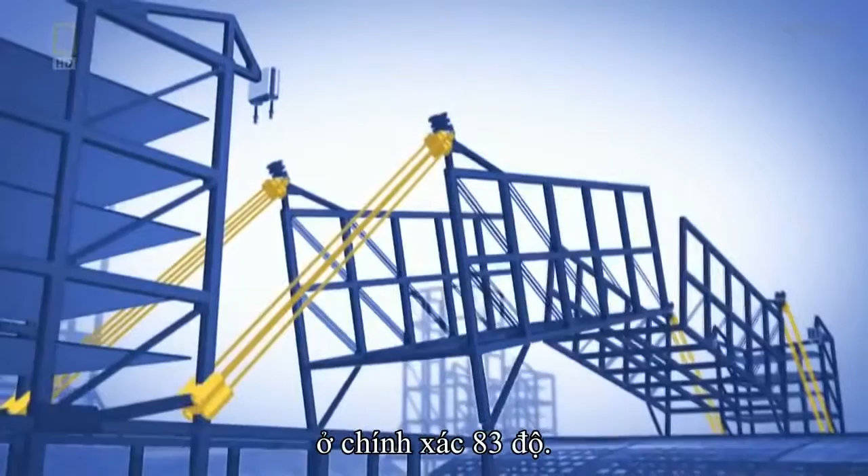But they'll need to settle their bet later, because they're about to reach the final tip-over stage, when the 2 towers are brought together, forming a steel bridge. Like giant puzzle pieces, the North Tower was built to mount into the South Tower. For that to happen, both 44-meter-long towers must come together at exactly 83 degrees and then be lowered simultaneously before finally landing only 10 centimeters apart. They are ready for the final stage. With precious time already lost, the two teams get right to work.

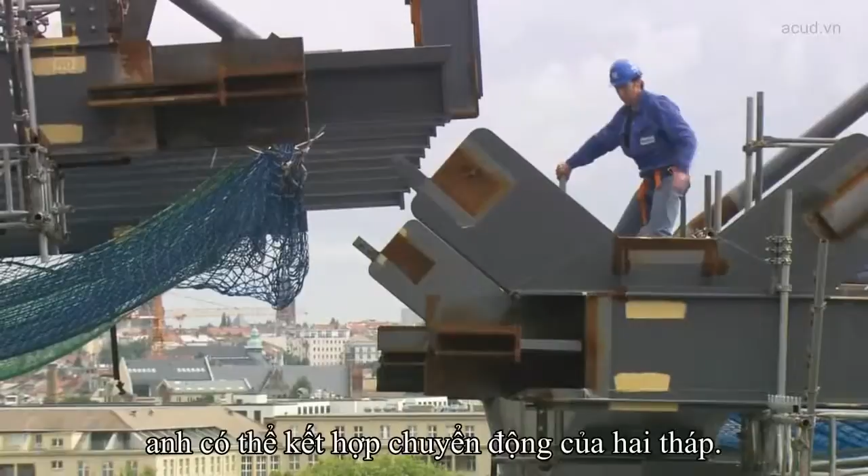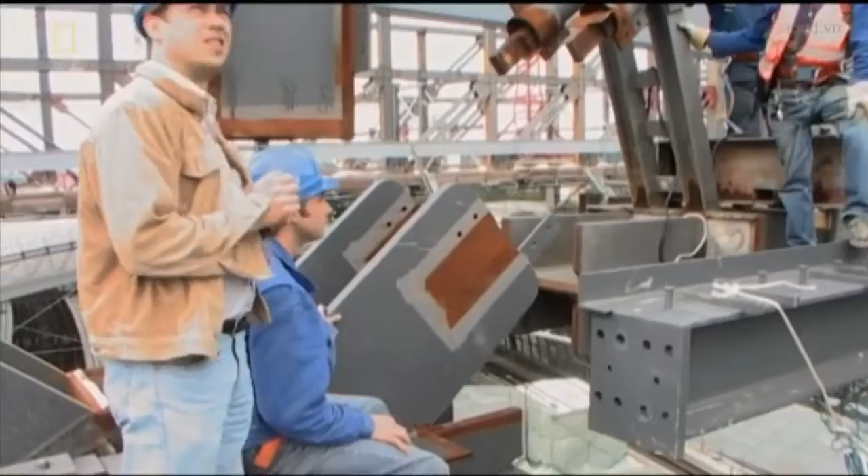Bernd climbs over unfinished beams, more than 40 meters out to the edge of his tower. From this precarious position, he can coordinate the movements between the towers. He gives the signal, and the towers are on their way down, only 5 millimeters at a time. A little up, a little bit over, a little down. Bernd checks to see if they're level. Voila! The lowering is now complete. Exactly as planned, only a 10-centimeter gap remains between the towers.

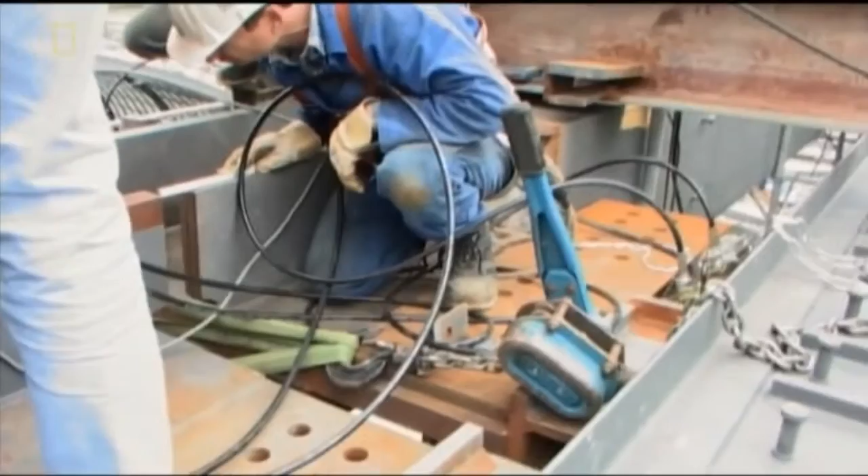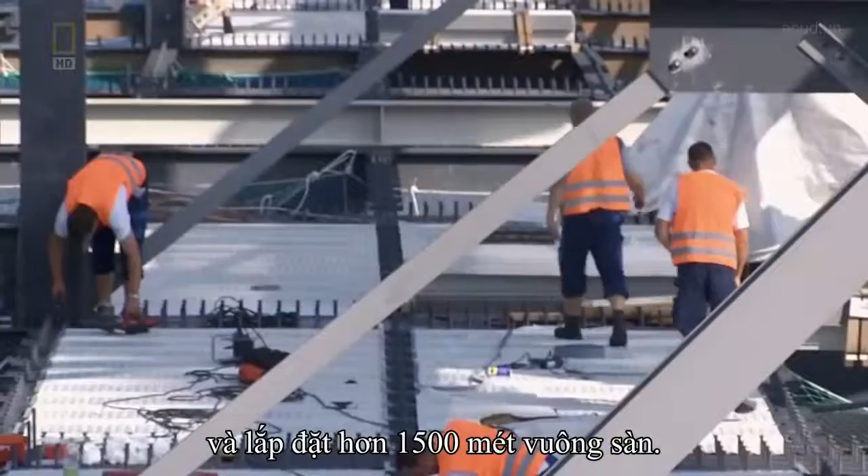To pull them together, hydraulic pumps, each pulling 100 tons, tow the two sides in tight, forming a bridge unifying north with south. But now is not the time to admire their handiwork. Before Berlin's trains can run through this station safely, there is still a lot of work to do. Workers must bolt the bridge sections together, make hundreds of welds, and lay over 1,500 square meters of flooring. Hours behind schedule, they know all this work will take them right down to the wire.

With the tipping stage complete, the foremen finally find a moment to relax. Bernd's not empty-handed. Super job. He knows when he's been beaten. Prost, Olaf. But not everyone is celebrating, especially the architect.

In 2002, already years behind schedule, the Deutsche Bahn, the German rail company that owns the station, decided to take drastic measures to meet their World Cup deadline. They decided to alter some features of the design. Over the architect's objections, they made two major changes. The first was to the station's most noticeable feature, the glass roof. Von Gerkan's design had a 430-meter-long roof, long enough to cover the longest trains. The glass and supports were manufactured to cover the entire length, but before they were installed, the glass canopy was shortened, ending it 100 meters short.

But perhaps the biggest change is in the lower subway terminal, where light cascading down from the upper levels was supposed to reflect off a massive cathedral ceiling made of metal, casting natural light 5 stories beneath the ground. Instead, the great cathedral was covered with a drop ceiling. Like in a supermarket, without any details, without any expression, without any charisma. The changes have saved the project time and money. That's how it is in big projects. You have to decide, do I want to meet my requirements, my time schedule, or do I want to finish every small piece of it?

But for the visionary architect, Von Gerkan, there are no small pieces of his masterpiece. I must say it was the biggest loss I ever had in my professional work. I, as architect, have built so many buildings, more than 200. Nowhere have things happened like this. Von Gerkan is so outraged he has now brought the case to court, hoping his vision may one day be realized, even if it has to happen after the station is built.

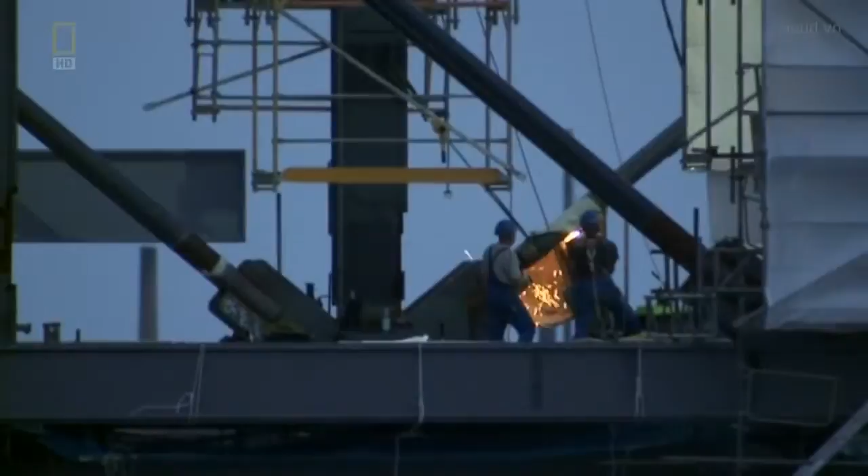Out on the bridge, sparks bounce off the glass station as the welders kick it into high gear. This weekend's deadline is approaching fast. The crew works late into the night, until finally, after more than 2 days of heroic engineering, the last weld is made. And once again, the trains start coming through the station. The impossible feat of building a bridge by lowering 2 towers has been a tremendous success.

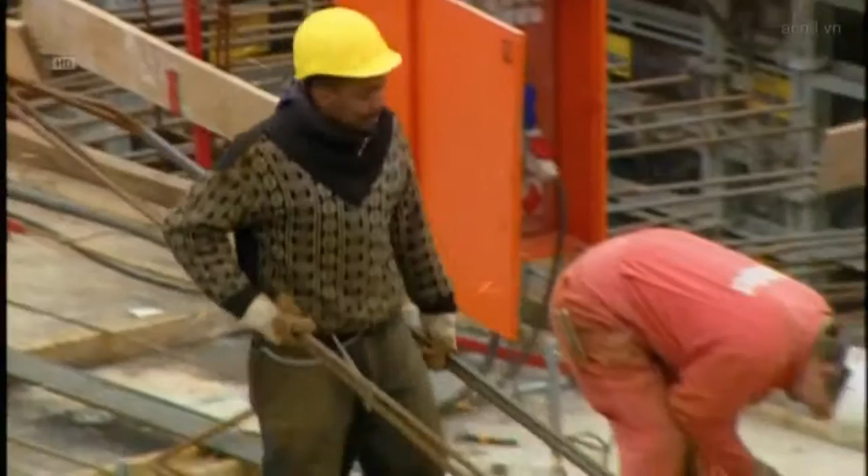But this crew know they'll only get 1 day off, because in less than 10 months, millions of World Cup football fans must travel through this station. So Tuesday morning, they start planning the tip-over of the second office tower. It is a race to the finish. Glass roof, tunnels, tracks, office towers, and even the landscaping. If they are successful, this mega train station will claim its rightful throne as Europe's largest, transforming modern Berlin into the center of Europe.